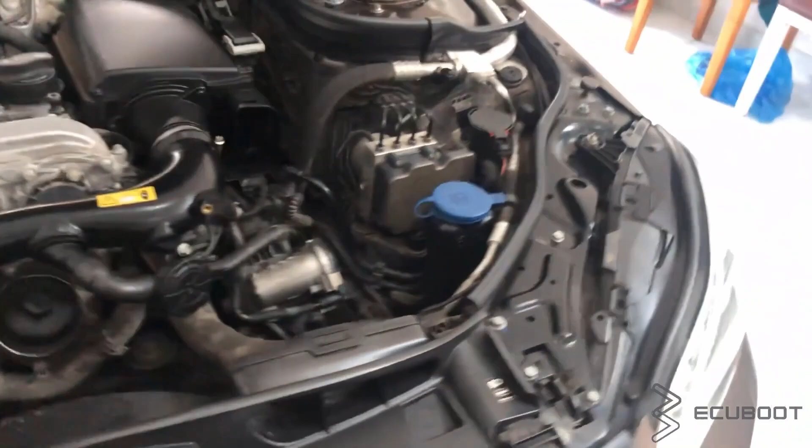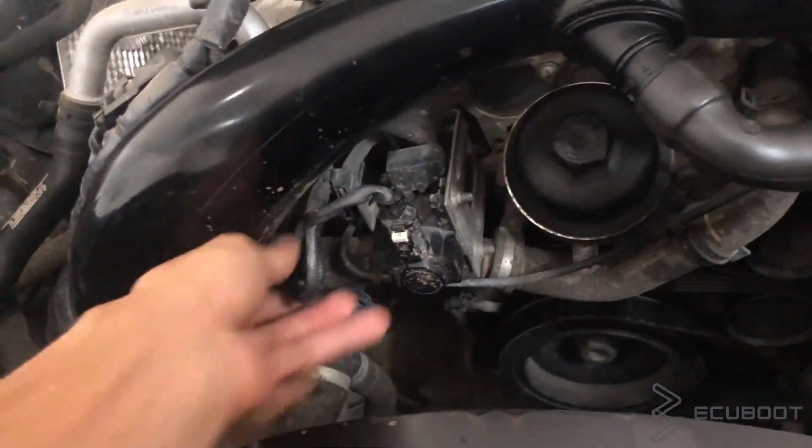Today we have a Mercedes E200 W212 using a 274 engine. We don't have any issue with it at the moment, so I'm going to show you the procedure for testing this engine's coolant pump. With this 274 engine, there are two types of coolant pump: electrical and mechanical. With this particular one, we have a mechanical pump. This mechanical pump system has a solenoid that controls the flap actuator to switch on and off the coolant pump valve.

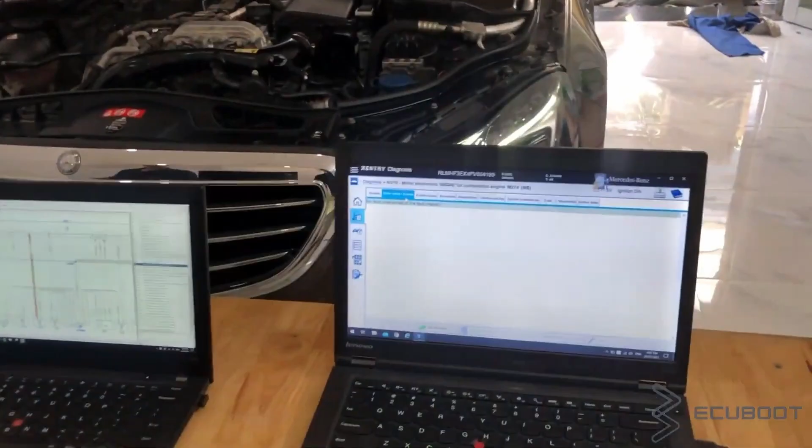So to test this pump, we're gonna need to use Xentry. I've already hooked up the OBD cable. According to the wiring diagram, the coolant pump switch over valve that I've shown you recently is Y133.

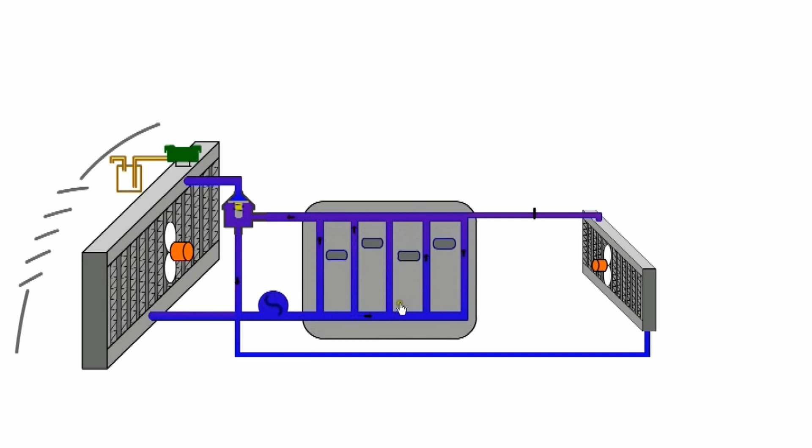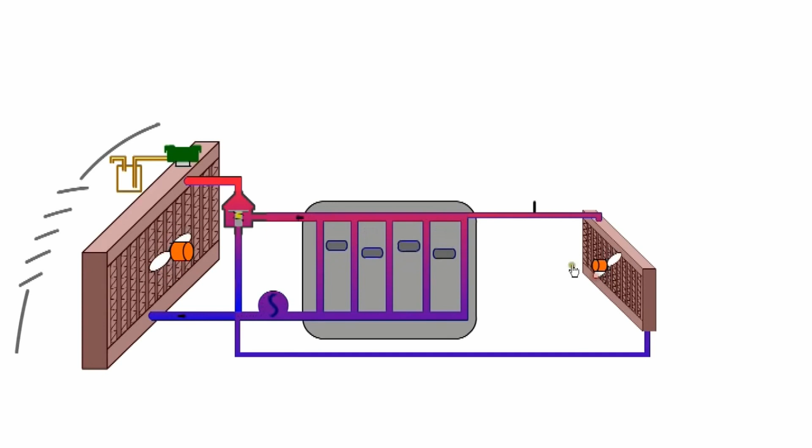Before showing you the process, I'm going to tell you how these valves work. The coolant system operates by constantly circulating coolant in and out of the engine. Coolant, driven by a water pump, is pushed through the cylinder block. As it passes through these channels, it absorbs heat from the engine. This heated fluid enters the radiator, where it is cooled by the airflow entering through the car's radiator grill. The fluid will cool as it passes through the radiator, returning to the engine again to pick up more engine heat and carry it away.

With our 274 engine, there are two different valves for two specific features to control the flow of our fluid: the thermostat and the coolant pump switch over valve.

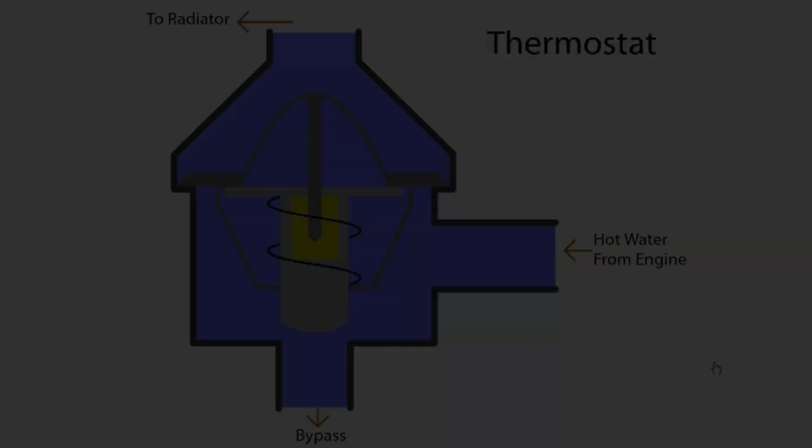The thermostat is located between the radiator and the engine. Depending on the temperature, it regulates what happens to the liquids. If the fluid temperature drops below a certain level, the coolant bypasses the radiator and is instead directed back into the engine block. The coolant will continue to circulate until it reaches a certain temperature and opens the valve on the thermostat, allowing it to pass through the radiator again for cooling.

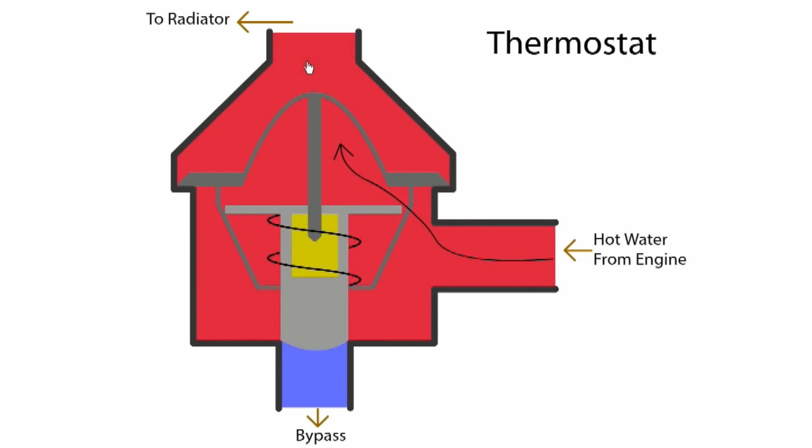Then, in order for the engine to reach its operating temperature faster, when you start the engine, the switch over valve is closed due to the vacuum from the intake manifold. This will block the coolant from the radiator getting into the engine's block.

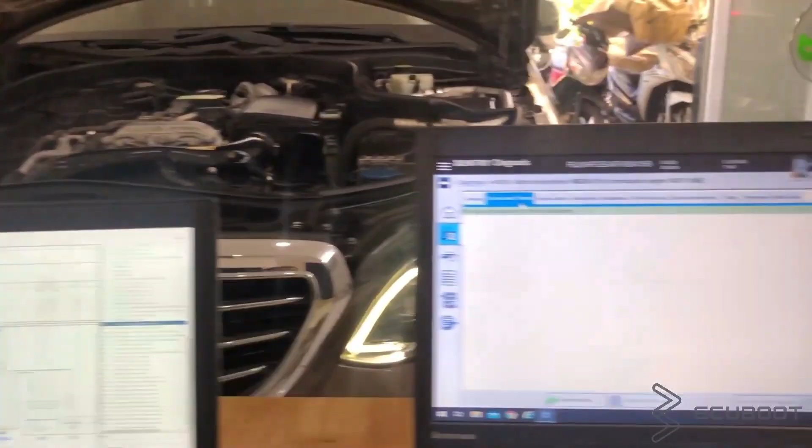So after the replacement, or if you just want to check whether the valve is still functional, Xentry will help you do the job. So firstly, choose our ECM. Go to test sections. Scroll down to find Y133.

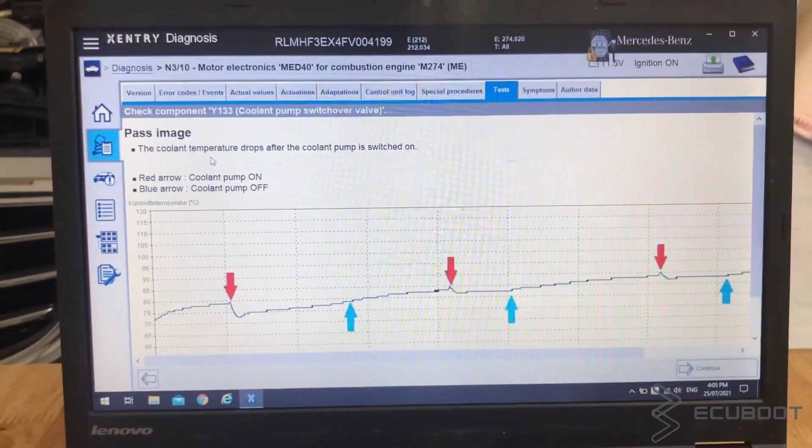As you can see, this image demonstrates the behavior of our coolant temperature as the pump is switched on and off. The red arrow shows when the coolant pump is on, and the blue arrow represents when it's off.

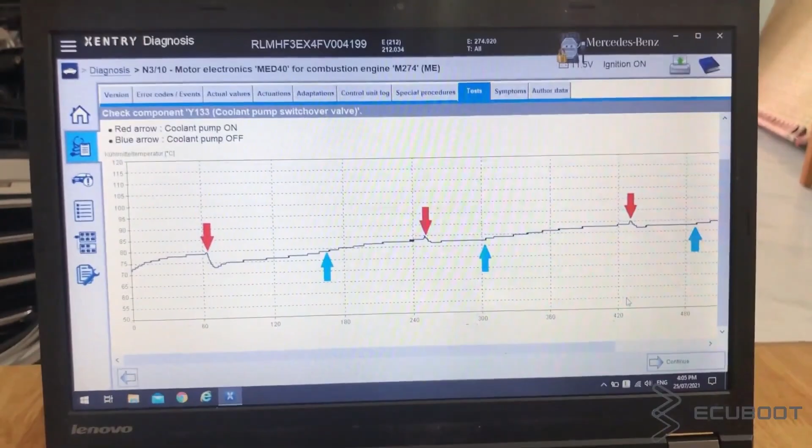The test requires us to do some prerequisites, so I'm gonna go ahead and turn on the engine so the coolant temperature can reach between 70 and 90 degrees Celsius.

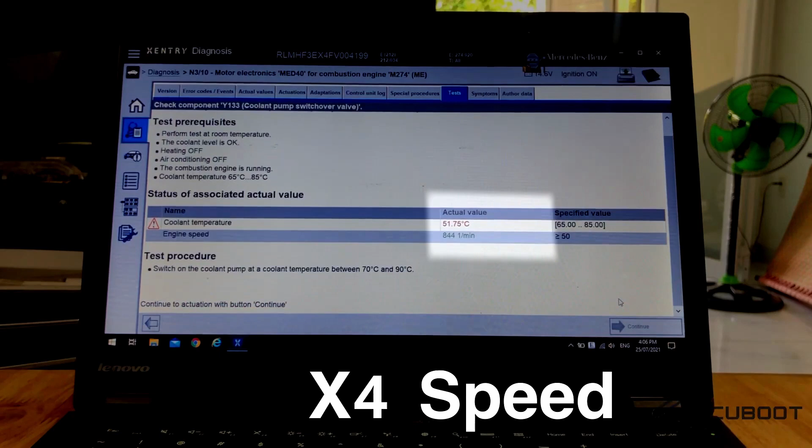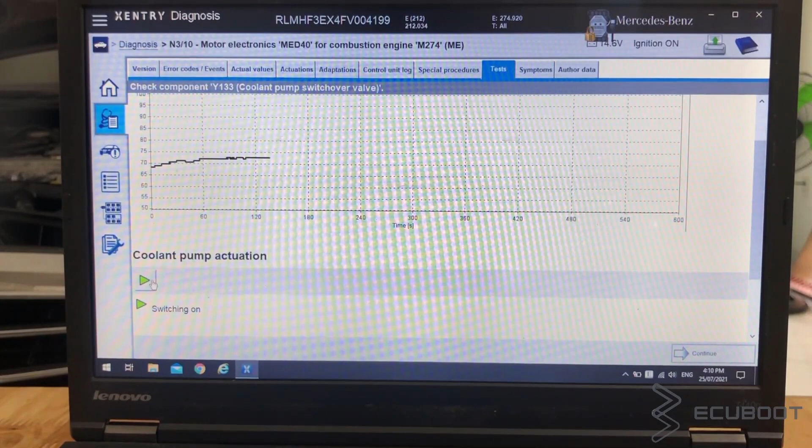I will turn on the live data graph for you to see exactly what's happening. Let's switch it on. As you can see, the temperature significantly drops due to the coolant being pushed into the channels, and when we turn off the switch, it continues to rise again.

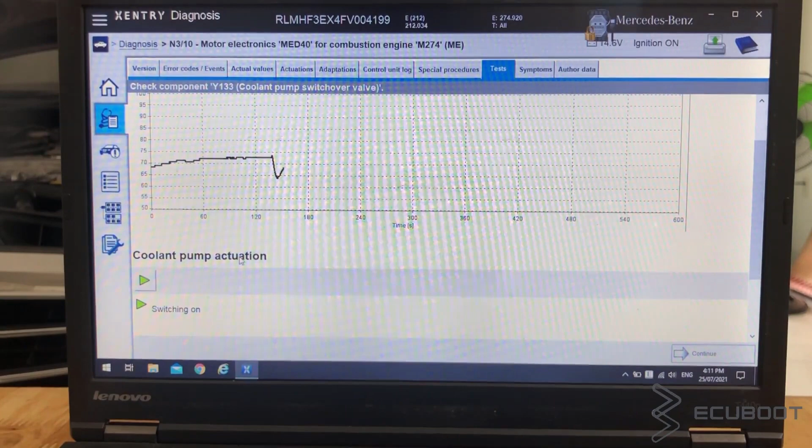If the test is good, press OK and Xentry will end the test. There's a green tick to remind you that this feature has been tested. And that's pretty much how you do it.

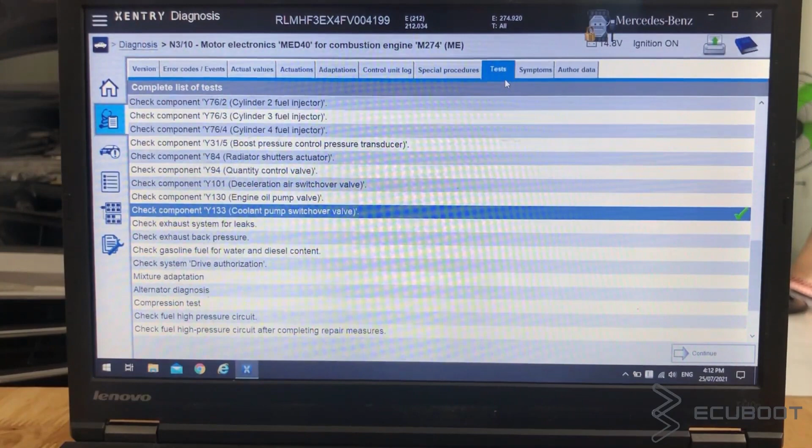So in conclusion, the 274 engine has two different types of coolant pump. I've just shown you how to test the mechanical pump system in particular by using the C6 diagnostic tool and Xentry. I hope you enjoyed today's video.